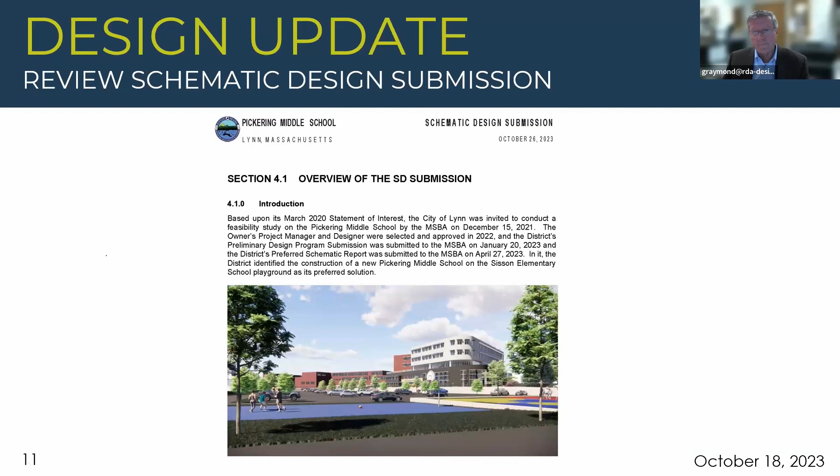The floor plans really haven't changed very much. We still have the 5 stories. The front of the building faces Magnolia Park with the administrative area in purple, counseling areas and special ed areas in green, the 2 music classrooms, a black box theater, the gym, the CAF. So this is really kind of the public area, for after hours.

There are locker rooms and changing rooms, which came out of some committee comments associated with the gymnasium. And then there's a community health suite and a nurse suite, and some custodial areas in gray. As I said, this floor is really kind of open, would be open after hours for these community uses.

Then on the second floor, we've talked about it before, but we have the substantially separate special ed programs, life skills and coach. This was a lesson learned from Thurgood Marshall. They're on this floor as opposed to being on an upper level, so if there's a fire alarm or some other issue, it's a much easier path to get out of the building than waiting for an elevator or perhaps carrying some students down a stair.

The guidance suite, one of these purple areas related to admin, has an internal stair from admin. So if a parent or guardian had to come up and meet with some counselors, they would get checked in to the main office and go up this stair and land in this controlled area. They would not go through the school, up the stair, and wander around trying to get here.

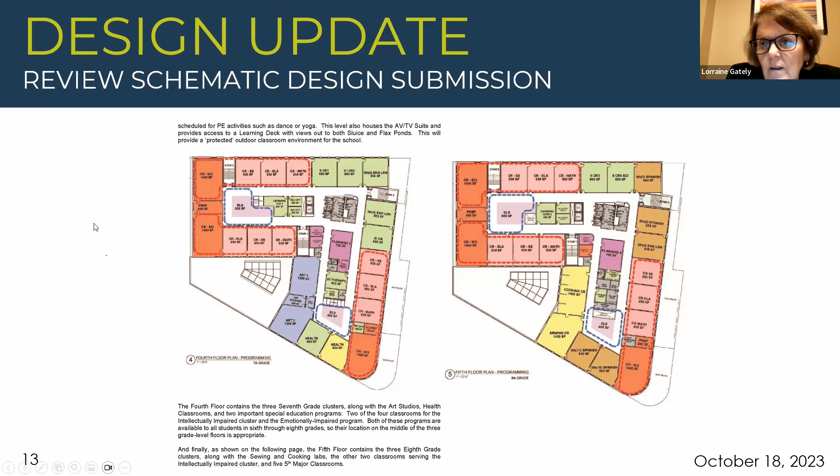Could you go on to the 2nd floor? Sure, yep, it's right here.

On the 2nd floor, I just want to be clear that we have exits going out to Conomo Ave in case of fire or an emergency. Yeah, that's a good point.

So the grade facing Magnolia Park is low, and we're digging the building into the hillside. So the grade on the backside is actually up here, at the level where the Sisson playground is right now.

That's why I thought we were putting the special ed on the second floor, because people wouldn't have to carry them down the stairs. They would just be able to go right out. That's right, that's absolutely right.

So these green classrooms here, they could come down the hallway, and there's a hallway right here with a vestibule out to a ramp that gets them down to the Sisson drive. Thank you, that's all I wanted to make sure, Jean.

Yeah, no problem. It's been there from day one. We heard that loud and clear. Okay, thank you.

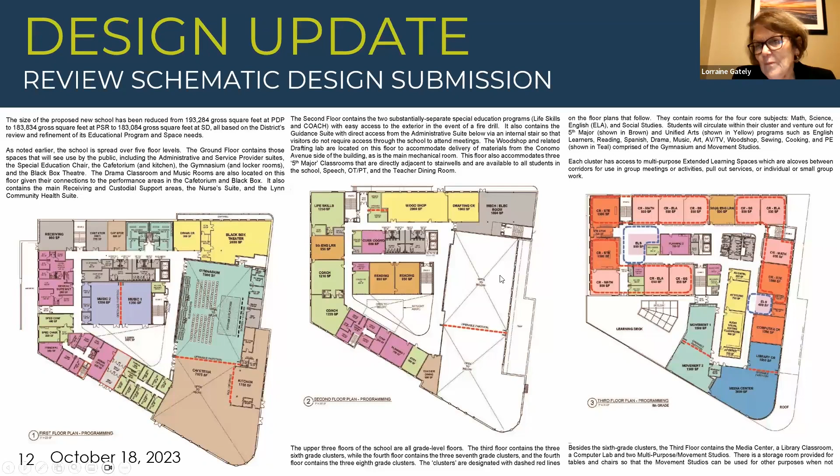I think you all have seen the plans a lot, but does anyone else have any questions on them? Or we're okay for the moment?

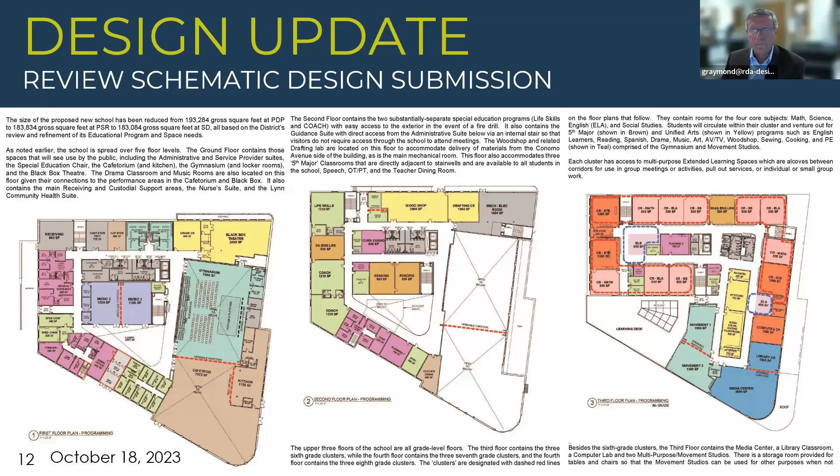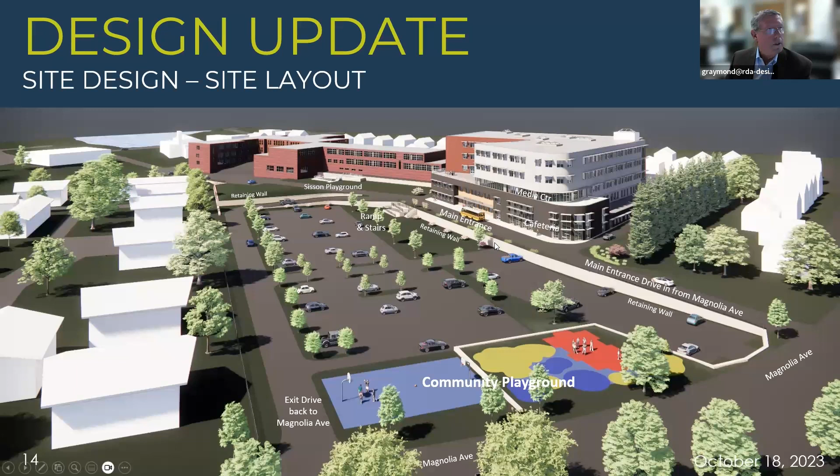Should I just go on to the next? And the geese will stop crossing the street too.

And Magnolia is down here. This, I probably went too crazy, but this is where the cafeteria is - it's a communal space, and right above it's the library, the media center, so they'll have that wonderful view out to Flax Pond across the street. The Sisson playground, you can see Sisson's up on the hill. There's going to be a series of ramps and stairs, but this whole area here is going to be their new playground. The gates would be here and here, so that people coming in from Broadway won't be able to get into the playground, nor people coming from Magnolia.

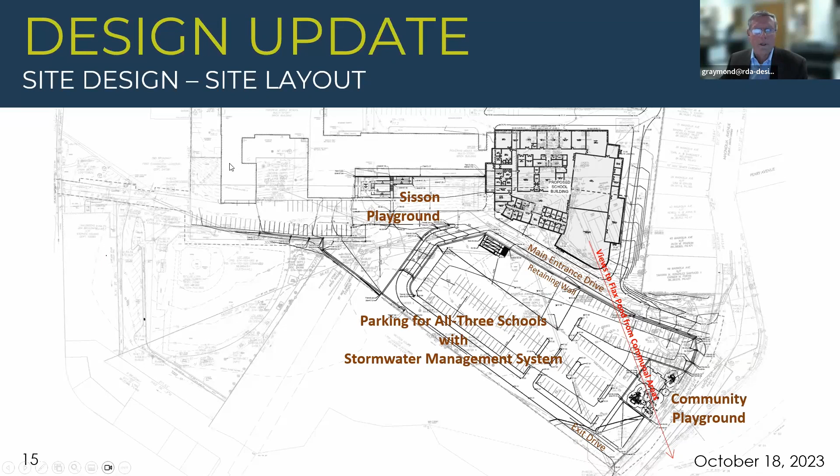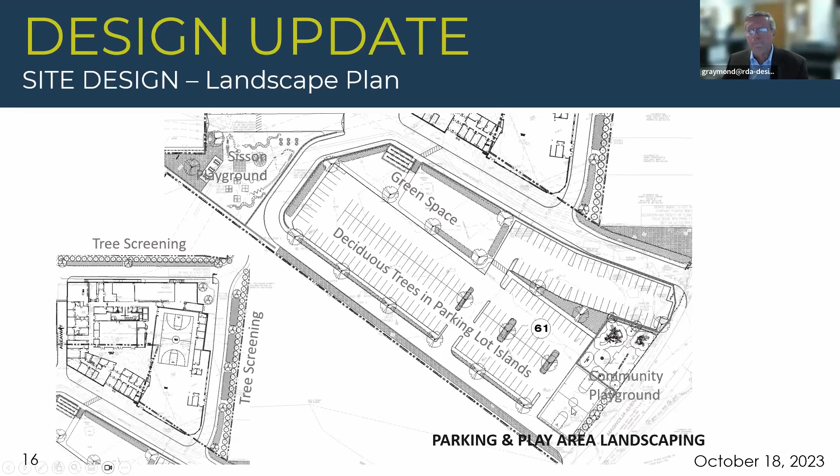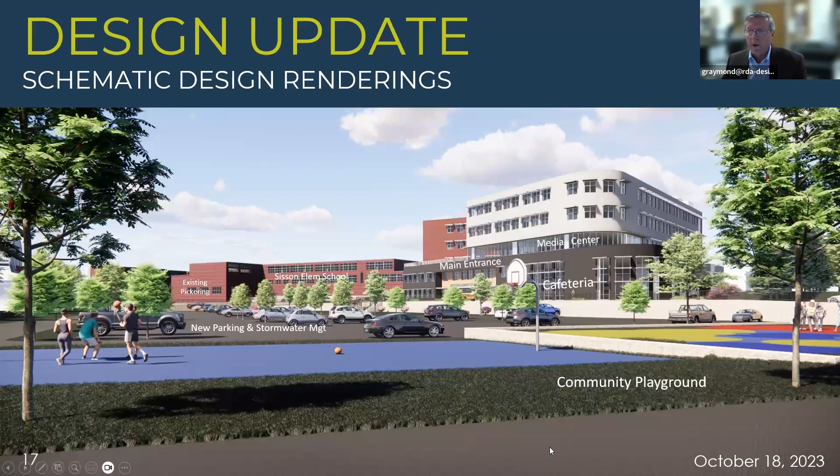So this is the view from the street. These are all gonna get kind of repetitive, but the first one was looking down as if you're a bird. This is Magnolia right here. So if you're on the sidewalk, the new playground - we haven't shown the structures - but the basketball court, the parking lot in the foreground, the cafeteria, media center, 8th grade floor, 7th grade floor, 6th grade is behind the media center, and the main entrance.

Right now it's recessed, it has an overhang, and as I said, we have a long way to go with what this building is going to look like precisely, but we're trying to break it up so that it's not just one big chunk of red brick. So we kind of have the first 2 floors, maybe a darker brick of some sort. We're trying to get something transparent and maybe separate it from the upper 2 floors, and maybe do some sort of red brick that relates to the existing Sisson.

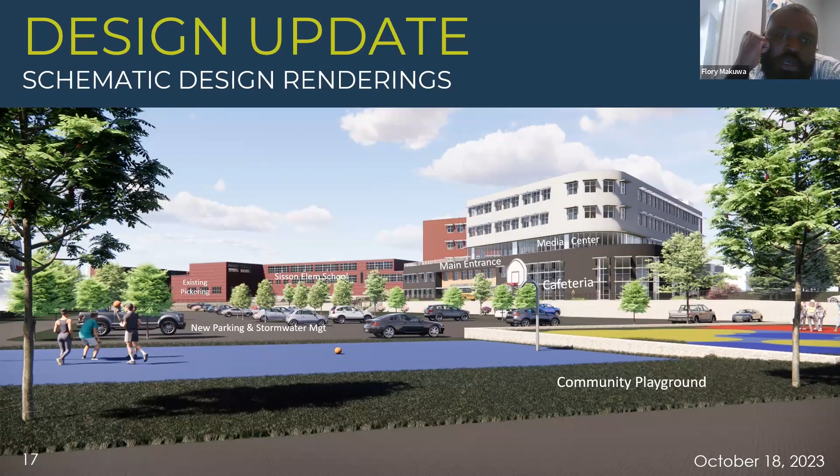Gene, will you have a mock-up done on site? We will definitely, when we're doing construction, for sure. But before then, we'll have a presentation on exterior materials that we propose and look to you guys for feedback.

And these renderings will be a lot more detailed, you know what I mean? Because we really have, after this submission, still another almost full year of design. So we really haven't started the detailed design.

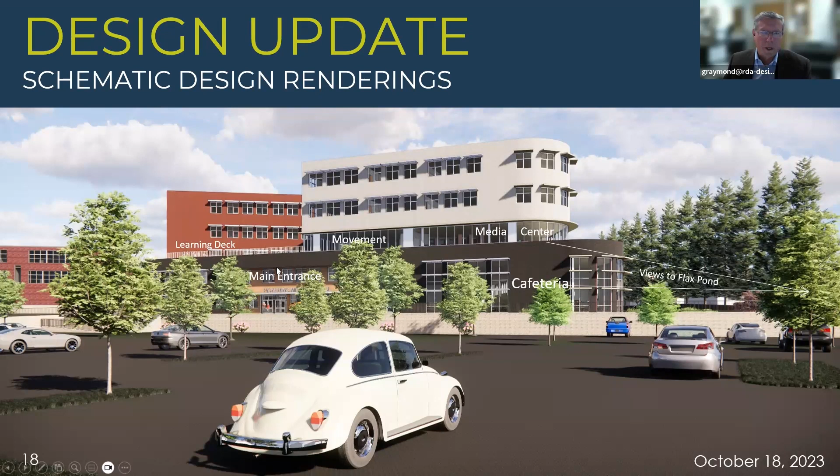So I'll go through this quickly. This is just as if you're in the parking lot and the main entrance, and the same, the learning deck, the glass wall, the cafeteria. Over in here, it's behind the tree, but that's how you'd get from the parking lot up to the entrance.

And you can see that a little bit better here. I can tell you right now, instead of all this zigzag switchbacks, I'm sure that we're going to come up with something more graceful for a ramp, probably longer, but not just this big cluster of chaos. But you can see we want to mark the main entrance with a different material.

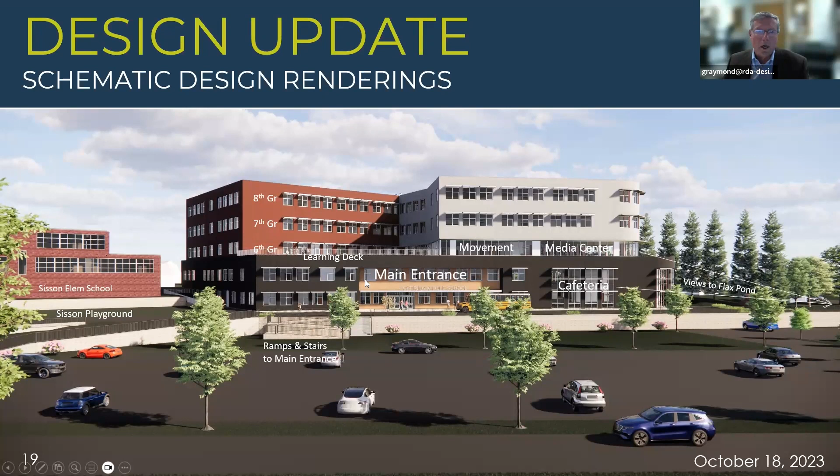And again, when you come in, admin's on the left and the cafeteria is on the right. The 6th grade is up on this floor, the 7th grade on this floor, and the 8th grade on that floor.

And this is if you were kind of flying above maybe the baseball field, and this is the back of the Pickering gymnasium, the back of Sisson. So this is the Sisson playground. It'll be elevated because we do want to not truck off dirt, so we're going to take the dirt we scoop out and kind of raise the site a little bit here. But it has those 2 gates, and so kids coming out of Sisson will be able to wind their way down to this playground.

And as you can see, Flax Pond is kind of out in here. So from the playground, from a lot of the communal spaces in the new Pickering, they'll have wonderful views.

Gene, just quick. Tom, I'm sorry. Yeah, go ahead. No, I just put it up. The Little League field, how is this going to affect it as far as building up around the Little League field? It's already kind of a bowl there that floods.

Yeah, the city has hired someone to kind of study what's an existing undefined flood zone around there, Tom. And frankly, we've been a little bit amorphous back in that area because the engineer that was hired needs to tell us exactly what elevation we have to design to. So I would say that everything in this area, like this wall, may end up getting pushed, and we may be bringing water from that playground, that baseball field, down through the driveway so it can get over to Flax. So I don't have a precise answer for you because we're kind of waiting for a little more detail. I know there's a lot involved.

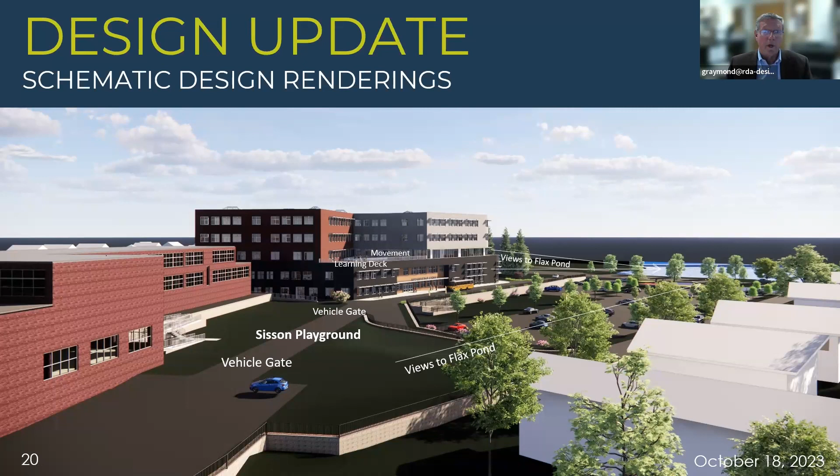Did anyone else have any comments or questions about this overall schematic design? It is schematic design, but there's a long way to go on design work. If not, I think I've already gone through this, Lynn. I don't know if you have anything else to add.

I think what I will add quickly is the schematic design submission is intended to support what we are asking for in terms of budget for the project. And it's supposed to back up what our costs are for the project as well as our proposed schedule for the project.

Gene, I just have a quick question on your narrative on security. Have you guys looked at some type of gunshot alarms for K to 12 in the area? We did not. We did meet with the public safety people, including obviously the police department, which was a big input. So is it safe to say everyone collectively agreed it was okay not to install one at this point? Well, we've never seen them. Well, no, we've seen them, but we've never installed them on an MSBA project.

Okay, and the budget was and remains pretty tight. But my understanding is it kind of covers a whole neighborhood, more like a city thing. Are you thinking of something different, like inside the building? Correct, I'm thinking about inside the building, or at least surrounding the building at a minimum. I think we're building a school that will last well after we're gone, so it seems appropriate, at least maybe just conduits, so if the city ever wants to do this as a capital project in the future, sure, but at least some infrastructure is in place. It seems like it's the wave in some urban cities with their schools, and we all know what's happening with the climate we're in, it's happening more and more often.

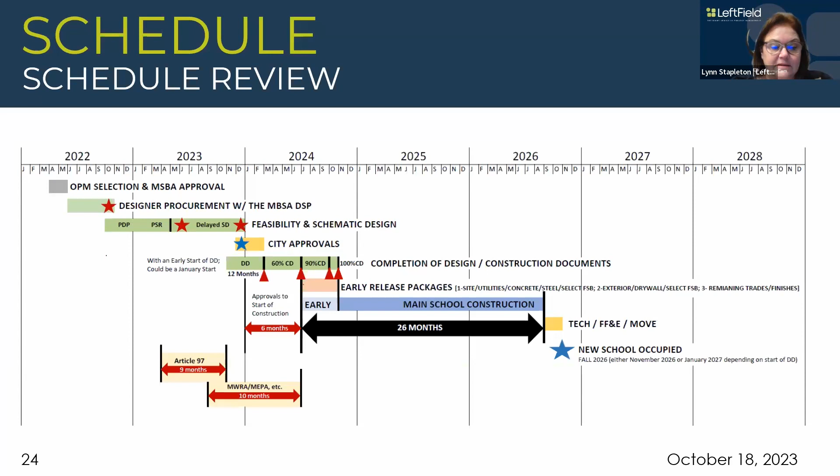Does anybody have any questions on the schedule? If there's no other questions, I don't know if anybody has any other business, comments, or questions.

Just want to say thank you, Lynn, for getting the whole package out. There's a lot of pages there, a lot of reading. Thank you on Saturday. Very well done.

Yeah, I'd like to thank you too. I'll echo that — thank you so much to the project team. That was a huge body of effort there, and really exciting, and a huge step forward tonight. So thank you also to the whole school building committee for all your thoughtful questions as we continue to move forward on what's going to be a really transformative project. So thank you so much.